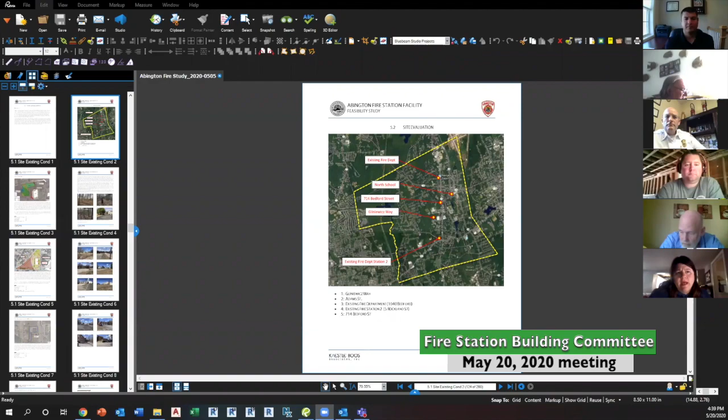Yes, okay great. As Roger just mentioned, we got the 5 sites. Let me zoom in here. So you've got the existing department site, the existing fire station 2 site, and then the 3 sites we looked at per the feasibility study: North School, which was part of the RFQ, 714 Bedford Street, and Gliniewicz Way, which we talked about at our last building committee meeting.

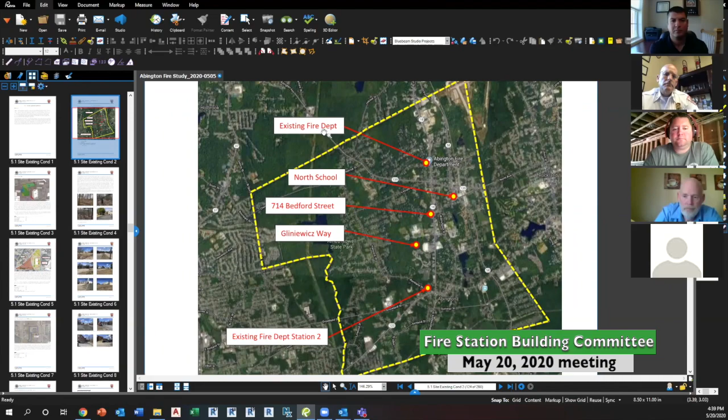But real quickly, just to touch back on the existing department location - it's a small site. Sorry, let me go to the page. Where is that? David, could help me with that. Sorry, okay, this is number 2.

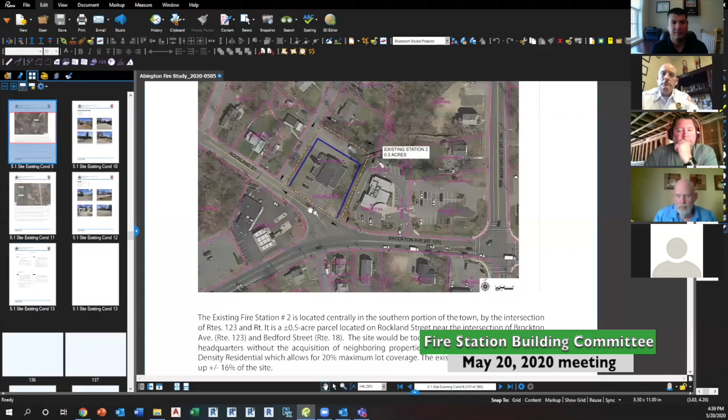Hey Sean, you mind if I jump in just for a moment, if I could interrupt you? Sure. Thanks. Hi folks, again, Chief Nuttall.

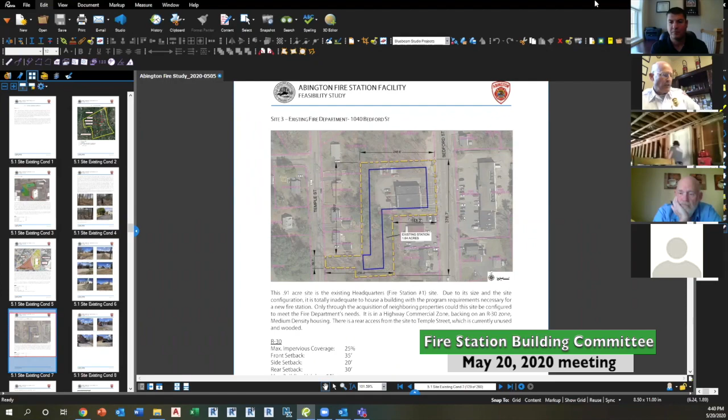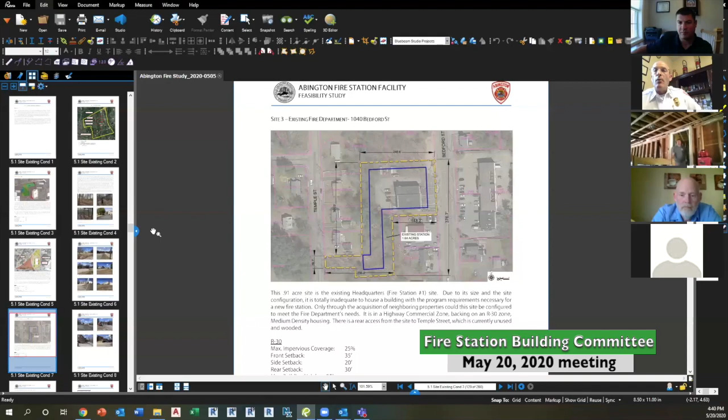Again, thank everybody for being here on this committee. There's been a lot of work on this. Any residents watching haven't had the benefit of looking at the large document we're all looking at now. So before we jump right into the recommendations and detailed screenshots included in this document, if I could just very quickly give a brief summary of what the document is to the residents that haven't seen it.

It's a thick 280-page document, broken down into 8 main parts that looked at all aspects of the Abington Fire Department and the existing stations. The first portion was a brief executive summary. Then it broke down into a very detailed analysis of both existing fire stations - the structures, mechanical issues, limitations, recommended repairs or improvements over time, and the size limitations we have. After that, it gets into a summary of a space needs program - what the Abington Fire Department would physically need for equipment and manpower, the number of personnel on duty at one time, and the space size of the station we would need.

We get into a very detailed response time study. There was a subcontractor that did an incredible analysis on response times from both the existing station locations as well as a couple different possible locations in the future if the town were to choose at some point to go there. We analyzed those sites in great detail, which we'll get into here.

There were some project costs on this with a full menu depending on what the town may want to do if we move in this direction, depending on what is included in the station - if we explored looking at possibly including a couple other town departments, so they're in there, or we can have it without them. We've got a good breakdown menu of that.

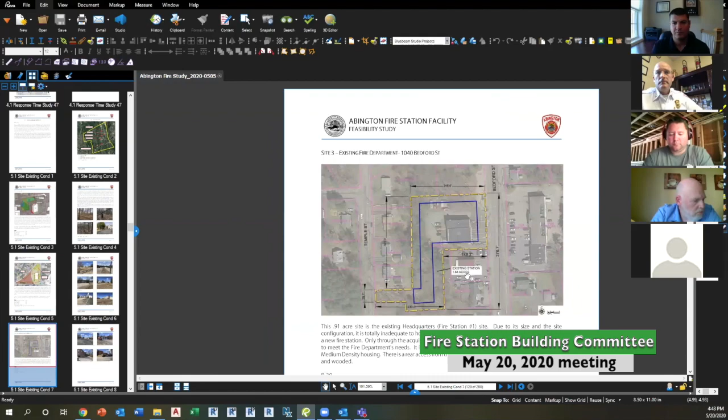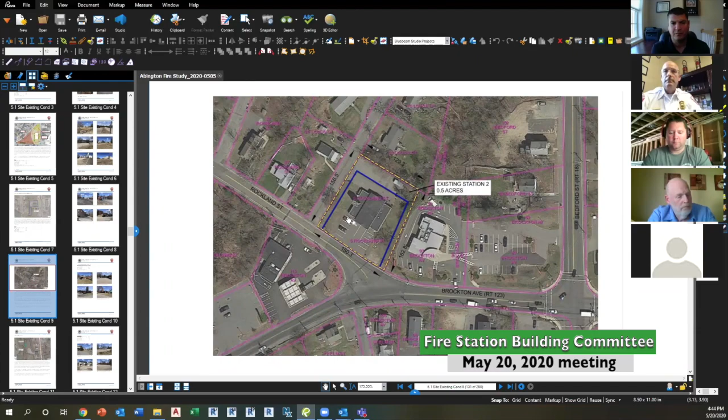So obviously looking into the site, looking at the existing station, it's maxed out pretty much the lot, the buildable area. So any addition, anything in the existing lot is really not feasible. Very similar to Station 2 - this is your property line, and then your buildable setback. So we're pretty much maxed out here. Any sort of renovations or additions to this location is extremely difficult.

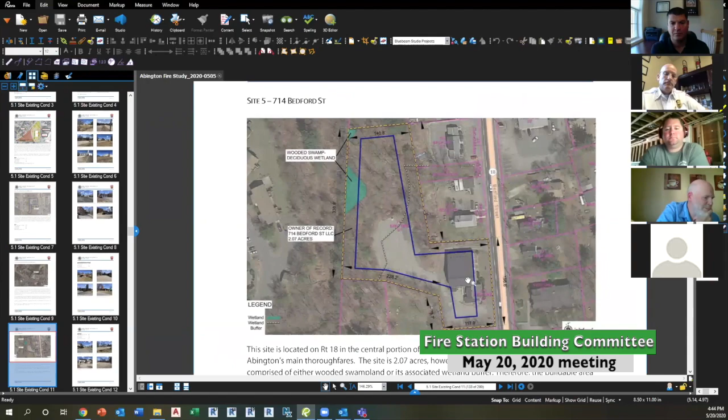After that, we looked at another property, 714 Bedford. At that time, this property was for sale. It was right along Route 18. It had some opportunity to build in around here, in the middle of the site and edge of the site. But again, I believe now - correct me if I'm wrong, Chief - this property has sold.

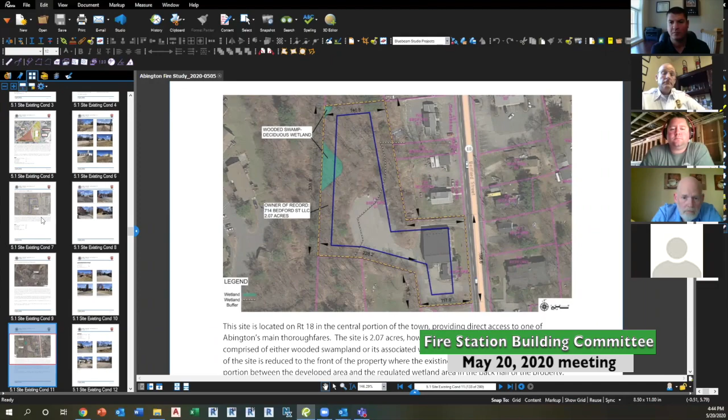So from that, we jumped to part of the feasibility study, and the RFQ was to look at the North School site. At the last building committee meeting, we analyzed it. We saw what was there, looked at the grading, the existing setbacks, and obviously the existing building. We did some hazardous materials reports and found out that there's hazardous materials. So all of those came into consideration, not only on the design of the site, but obviously budgets and costs to look at what it would need to do to put a new building on that property.

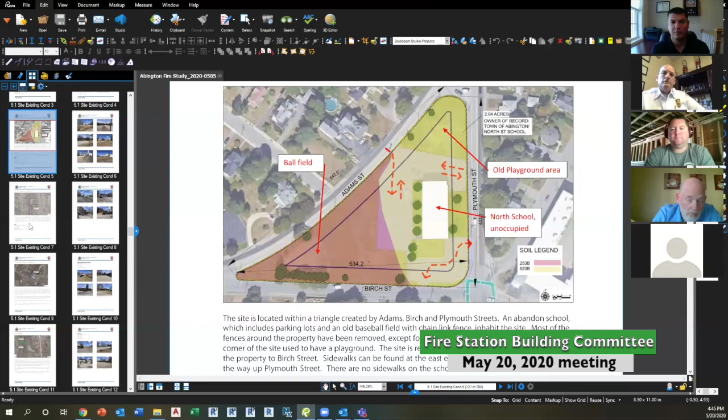And then lastly, we looked at the Gliniewicz Way site. As we all know, it's down across by the high school and the middle schools, down by Town Hall. We looked at this lastly at our last building committee meeting and talked about a couple of the options. There's two separate lots. This lot here is currently owned by the Abington Housing Authority, and this lot at the rear is a privately owned lot. There's been subsequent conversations with the landowner that they'd be willing to take a look - whether it's a sale of the property to the town - to build a new facility on this project.

As we get a little bit further into the study... sorry, bear with me here, take a second to load up. So, pros and cons of each of the sites. I don't know why my computer's freezing on me, sorry.

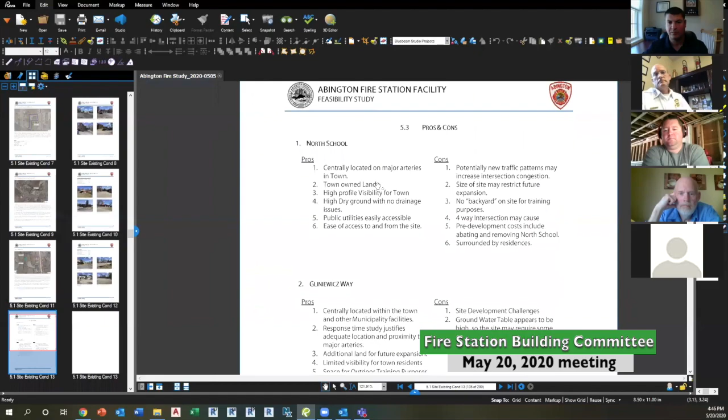Okay, sorry about that. So as we initially looked at it, we have these two sites that we feel have adequate property, some more than others, but we did a really initial pros and cons of each of the sites that we're looking to recommend, not only to yourselves, but to the town of Abington, to construct a new facility.

Some of the pros of the North School: it's centrally located along major arteries, it's town-owned property already, it's got some high-profile visibility of the town, it's on high ground so drainage shouldn't be an issue, and it has accessibility to public utilities and is easily accessible.

Some of the cons on that site: there's going to be a lot of new traffic patterns that would increase some of the congestion of that area, which we touched on briefly last time. The size of the site - as we get a little bit farther, you'll see how there's not much room for growth. We kind of max out the footprint of the building, as well as take up all the usable space on the lot.

Since it's located on a triangular type piece of property, there's no really backyard to the site, so it's all public, and there's no back of house area for the department. A four-way intersection may cause some heavier traffic and some accidents. And then pre-site development costs would include abating and removing the North School - so those costs would have to be incurred by this project, demo of the school, abating of the school - and finally it's all surrounded by a residential neighborhood.

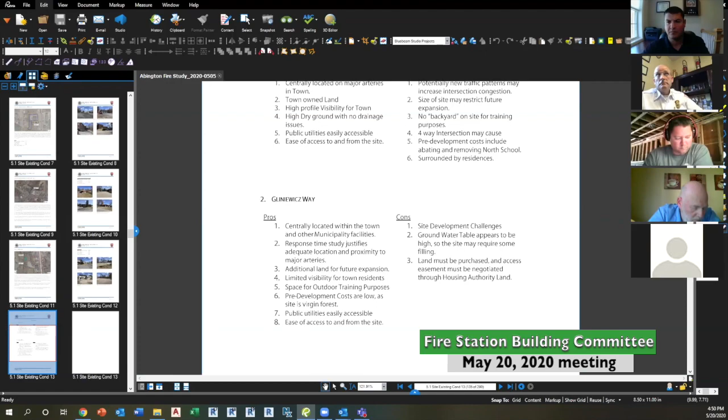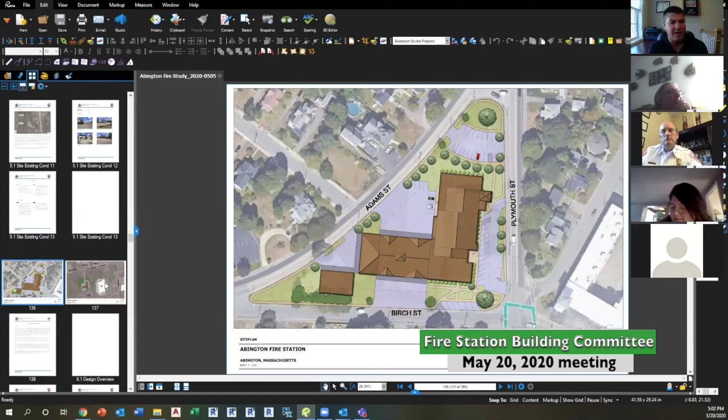Any other questions on this site? As we go through, we're going to come up with a few more things we want to bounce back and forth on. But if you want, this would be just a good overview, and then I'd like to get deep into a few other things, and we can discuss as we go.

Let me try to dig that up. One thing for people to know who either never saw our previous meetings or didn't attend - the difference between these two sites is this lot here is over 6 acres, and the North School site is just over 2 acres. There's a considerable size difference between them. That's why you're able to get so much more apron space, much more parking, and as Sean just said, there's more room for growth.

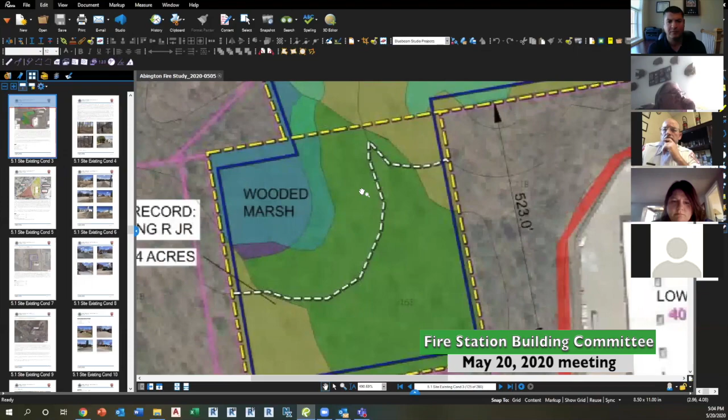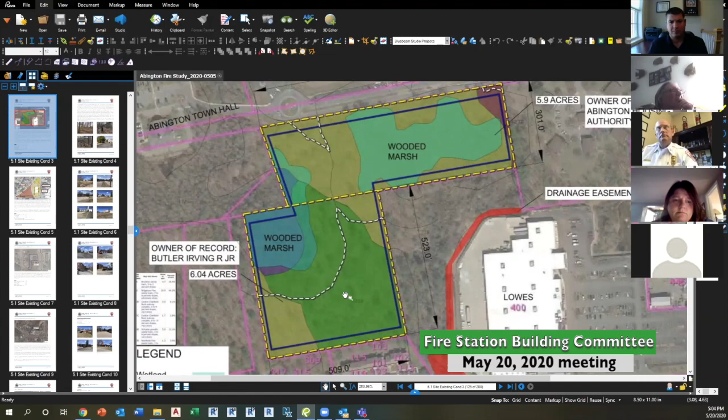As Derek just mentioned, the site size here is 6.04 acres. Looking at the wooded marsh area here and the wooded marsh area in this location from the local or state GIS, the traffic entering the site would be splitting between the two wetlands, with our building placed in this back corner, as you just looked at. The North School site is 2.84 acres - roughly 3.5 acres smaller. Understandably, some of it is wetlands in this area, but it's easier to fit the program required for a new station on this site.

And there would be some other challenges to this site as well, but as far as the wetlands go, the study did note that there was no FEMA or environmental restrictions. There would still have to be some additional conservation and flagging that would have to be checked out, but that was noted inside the study as well.

Correct. When I was reading, question on the entrance - would that have to be accessible or considered a public way or private way?

If I can, Derek, I'll jump in on this. Jim, you're absolutely correct. One of the challenges with this site, the site's a great site where it is. And once we're on Route 18, from that portion, it's almost the geographic center of town. And we get into the propagation studies and the response time studies, that really afforded us the best response times to most places in town. The challenge, however, is getting from that building to Route 18.

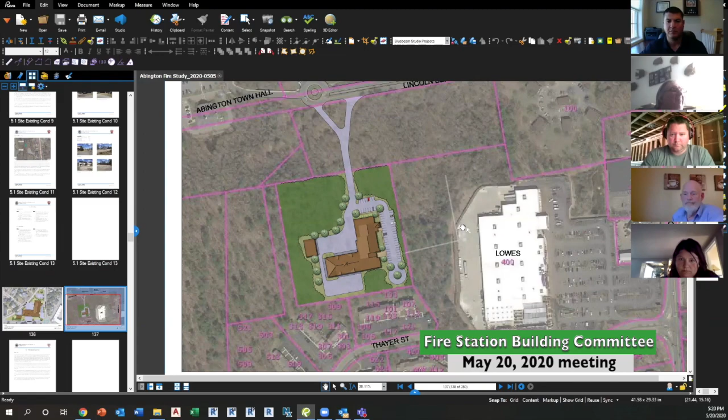But when you look at the amount, you've got parking area, the building, and the roadway out to Gliniewicz Way, that's all going to be shedding water that you're going to have to manage somehow. You're not going to be able to just dump it off into the existing drainage lines out there.

I think somewhere up there it splits off. Either one portion goes to the east and the other goes to the west towards Town Hall.

I don't know anything about water drainage, but could we just make a ditch? I think all those properties behind, to the west of the site, the areas behind Town Hall—I don't know who owns or what's back there as far as water shedding goes.

Everything that's—I'm pointing to the screen, you guys can't see me pointing—but the red spot right there, just south of that, Town Hall. So just south of that, all that area would be to the west of this proposed site. I feel like there's a lot of area there to shed things.

If we have a retention pond, it's a good excuse to train in drafting. That's true. Yeah.

So that comes down to the owner of this lot here, obviously, which is the senior center, whoever that is, and this—I'm assuming this would be town land or housing land here, you know.

But like the chief had said earlier, it is just an island, and that kind of brings a lot of the cons into it. This is why there's more cons on this side, I suspect, because whatever we decide to do there, if the town does decide to use this lot, you're stuck with what you have for land. There's no room for expansion at all.

But the building was proposed in a way that this building study—all the actual space needs for all the rooms and the layout of the building—was designed to get the square footage, which was roughly around 40,000 square feet, I believe, Sean, just below. And that's designed for a building that's prepared to be there for a long time.

It's got room to grow for the building, but as far as space outside the building, where we do a lot of fire training, hose testing, aerial operations—there's a lot of things that we do outside with our vehicles, and that lot was pretty tight.

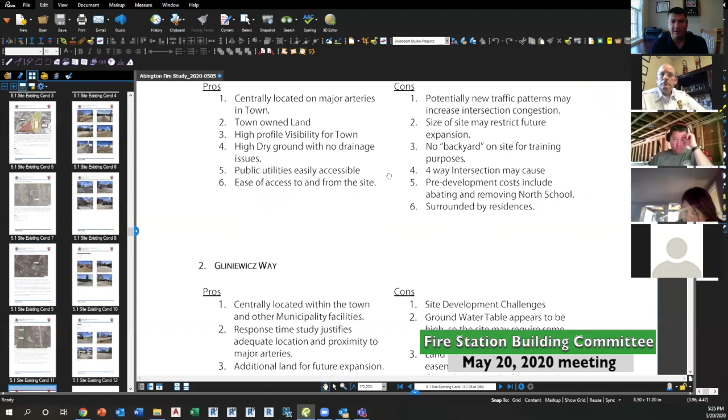When you look at the Gliniewicz Way site, I feel like it's opposite. Things would take a little longer to get going from the start. There'd be more work up front, but it would provide a long-term fix for the town going forward. There wouldn't be any restrictions going forward with that site. But there are site development issues, groundwater issues, and egress issues that we'd have to look at.

The restrictions on Gliniewicz Way that you might want to consider are the amount of wetlands you have and how much wetlands you can alter. If you alter the wetlands, you have to find an area to replicate it. You're never going to get rid of it, so keep that in mind.

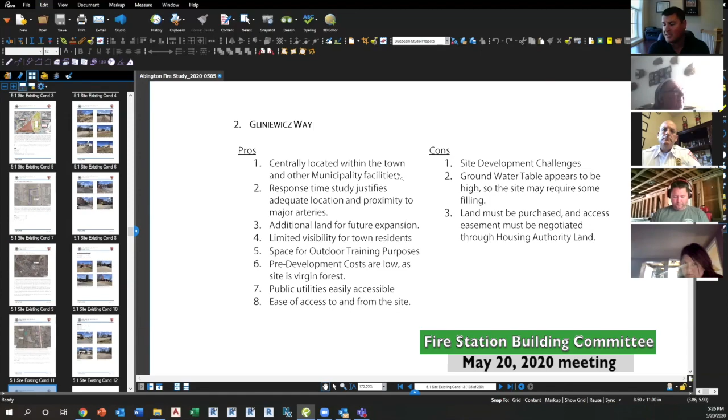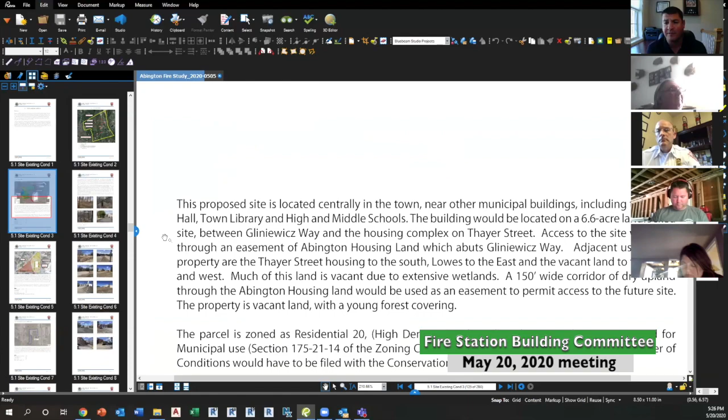So the study did show that back bottom corner of the lot didn't have any restrictions, according to the current maps that KBA was able to find and put into the study. That back area is where you'd build the building itself, and the amount of area you'd need for large aprons and space to move around, except for the northwest corner of that picture, the wooded marsh. That would be the area that we wouldn't be allowed to do anything with.

But the bottom area would work. Yep, correct. So where we brought in a road, we're splitting the difference between the two wooded marsh areas and constructing the building in this L-shaped portion, the lower portion. So for stormwater management, we're not touching these two areas, but we're able to manage some of it over here, and some over here.

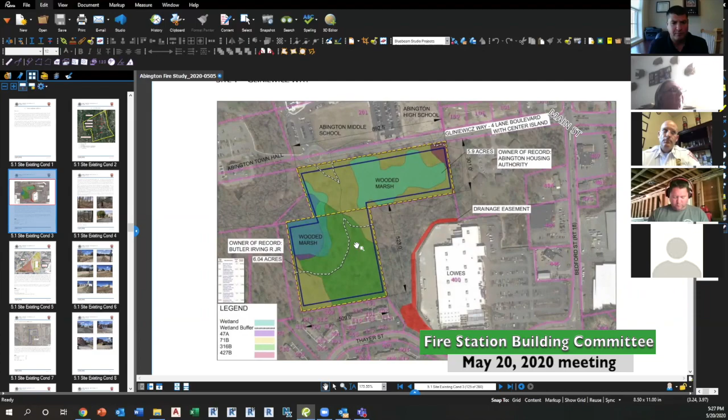Jumping over to this, you can overlay these two maps. Again, this upper corner is untouched, so stormwater management happens over here, and then probably in this area, potentially tying into Lowe's already.

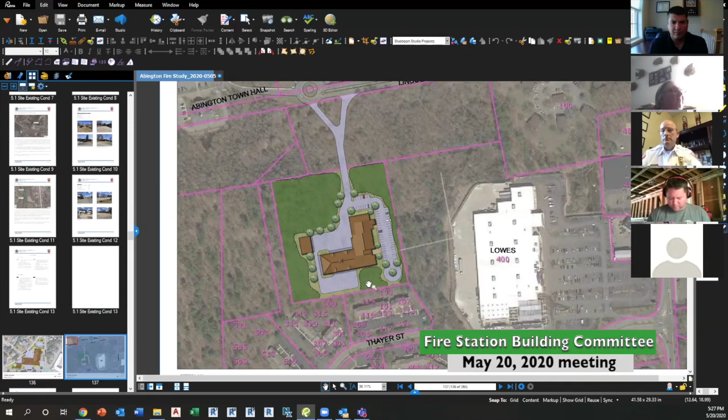Can we go back to that previous illustration? I'm wondering, what is the white dotted line? Is that a 100-foot setback, or what is that? This is the setback off of these. Okay, so we're putting everything in this corner. The roadway, yes. It has a 100-foot setback, so we can clearly go in this area, correct?

Yes. Considered what they call a buffer zone from the wetlands, a 100-foot buffer. Because Jim, to be honest, I absolutely share your concern about the wetlands, and if we had to replicate wetlands, sure, we can do it, but we have to pay for that. Yeah, it's costly, very costly.

But one of the biggest concerns I would have is the stormwater management for the overall project. And everyone knows that the water table in that area is very shallow, so whatever type of system you put in has to accommodate that.

I believe Sean mentioned earlier that they did factor a lot of that into some of the allowances for the site work. If you looked at the cost analysis between the two, I think the site work was a little bit more for this because of the extra work it would take. But again, they're all allowances, budgetary estimates. I can dig into the exact costs, but I believe we're about $1 million more on this site.

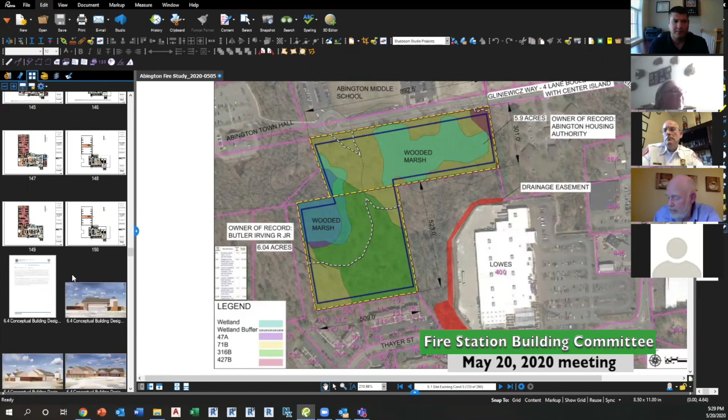So Gliniewicz Way site development allowance, we're at 3 million. Yeah, $1.5 million. And then we did a site work allowance at North School site, $1.5 million. So we had about $1.5 million more on site development costs. Number one, it being undeveloped, and bringing in infrastructure. And then the other piece would be stormwater management and additional wetlands, all of those items that would need to be considered once we proceed with design.

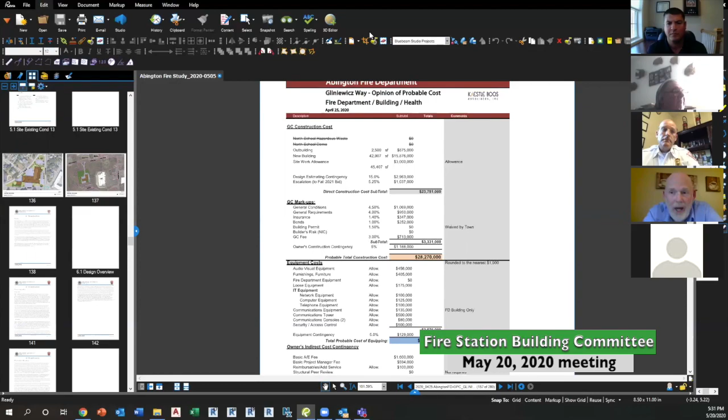So my concern, not really a concern, it seems strange that the delta is so small between North and Gliniewicz Way, and that site development cost of $3 million probably does not take into budget any potential future roadway. Would that be a correct assumption? Yes, I think because that's more of that long-term solution. Obviously if it's an additional roadway that's cut through other lots and wetlands, so we really haven't—do we have an allowance for potentially doing that work or no?

Or is that yet to be determined? So there's no allowance, no budget for what you don't know. Correct.

So we don't have like a contingency dollar value. Yeah, we've got a lot of contingencies built into that, but there's not a specific line item for a new access road, whether it's parallel to Lincoln Boulevard, running out to 18, or running through here, going out to 18, or a road coming off to there.

I mean, we've budgeted enough to carry what we're doing on this lot that we feel comfortable with. But obviously, any additional roadways, as you know, that's a separate project within itself. But we do have fairly healthy contingencies built in.

Just at this point, we're at, I don't see it. I thought reading a 5% contingency. So we got a 15% contingency just on the design. Okay, so on the design.

Correct. So built in, not to get into too much right now, but the $3 million site development costs, or site work allowance, design contingency built into that. So it's roughly $3 million additional design contingency with those slight escalations of construction, or bid of next fall, which that's escalated out 5.5%, 5.25%.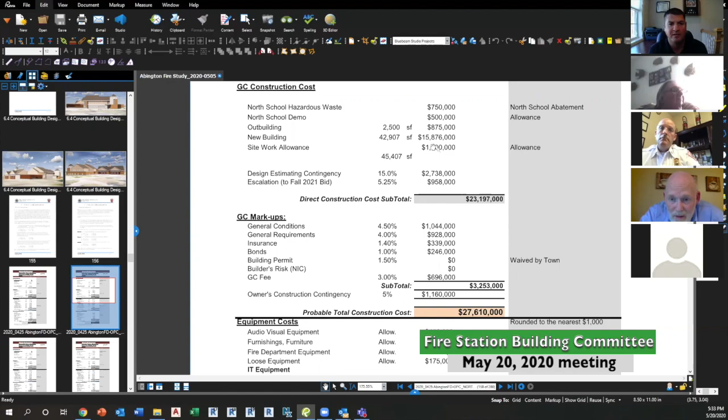And the North School site, the two allowances, although those differences are 1.5 million in differences for site allowance, what this one shows is that that's a full $3 million allowance. The other one shows a 1.5, but doesn't show that you have to also subtract the 1.25 it would take to tear down the building and do the hazardous waste.

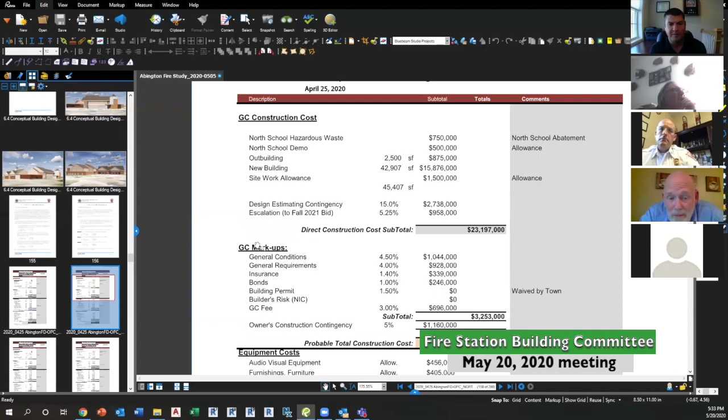Right, that's a real expense. That's a huge expense. When I look at the owner's construction contingency at 5%, I mean, they're all just numbers at this point. I think it was just about 5%.

A little bit higher up, I think. A little on the light side, oh, I'm sorry, side when we have so much unknown. But I guess I'm not sure what. I'm just going to let you continue with the presentation. I got to absorb this some more.

If I could jump in just for a moment too, because now we're getting into the numbers, I just want to talk to everybody on the committee as well as the residents, which we are all residents, because we're seeing some very large numbers, and quite frankly, there was sticker shock when we first saw these as well. You know, KBA explained how they got to the numbers. We agree with the numbers and how they got to them. However, we're not blind as to the economy that we seem to be slipping into at the moment, and we don't want to make the residents think that we're not.

Certainly, there's needs for the fire department. You know, the document's heavy. It really comes down to these pages. What would a recommended cost be? And we're looking at very large numbers.

This is not monopoly money. This would be our money, and I fully understand that. So, and again, to the residents, we're not quite sure where this is going to go. Ultimately, you'd have the votes, assuming what this committee decides to recommend to the Board of Selectmen, and then see where it would go from there.

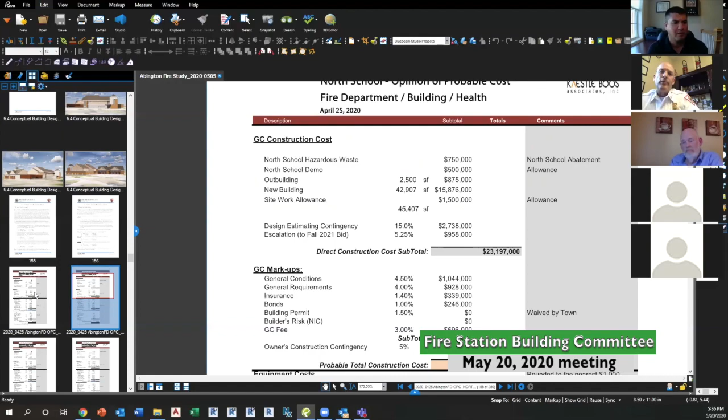So if you want to start getting into the numbers now, Derek or Sean, I just wanted to preface it with that. That initial page, I think it's either 155 or 156, a couple before these, just shows the actual cost estimates. I think it's the next one, because this is just the construction estimate. This is the total project costs. As the chief said, this is kind of like the menu of what's going on.

There's two different sites that the committee came to agreement with in our last meeting, and then it came down to, well, we did a floor plan space needs program with the architect at the very beginning of the feasibility study, and he designed rooms based off of everything that we do currently out of the Abington Fire Department and what the needs are for the department. So that was room by room, which came up to a general square footage. You can see it there - it's roughly around 40,000 square feet.

The differences in those are if we took off a couple of the departments that we had added in there. Initially, we were trying to fit the health department and the building department into the building to try to help free up some space at the town hall building. The two departments kind of work hand in hand with the fire department as far as fire prevention goes, and the health department, because we run EMS, emergency medical services, out of the fire station. It kind of seemed like a good fit, but that would make the building a little bit larger and cost a little bit more.

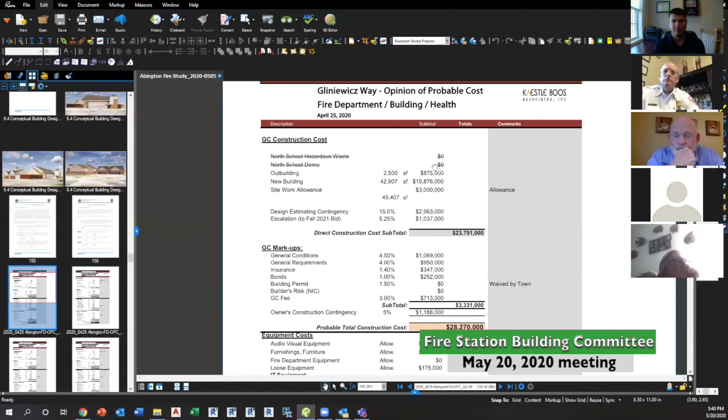This one obviously doesn't include North School hazardous material, waste, and demo, so that's kind of in the positive right away. These are the initial square footages of what this is - kind of our maxed out square footage of the new building and the smaller outbuildings.

So those have 2 different square foot costs. Really what it comes down to, that's our generalized budget estimate for those 2 buildings. And then the site allowance, which we just discussed a few moments ago. So overall square footage of construction, roughly 45,000 square feet.

So with that, we always build in contingencies from a design aspect. At this stage, we're usually right around 15% or so. So again, there's another $3 million design contingency. Escalation, again, on today's standard, even before we were dealing with what we're dealing with right now, but starting into next fall of 2021, this is an escalation cost and you may see things. So then you get a direct construction cost budget estimate of roughly $23.7 million.

And then we talk about looking at general contractor markups. These are typical for all different construction types, construction projects, specifically in Massachusetts for public bidding. But you have your general conditions and general requirements. That's kind of the initial overhead and profit for the contractor, and that roughly goes between 8.5% to 10%, depending on the economy. Insurances, that's normal. Bonding, that's normal. Building permitting, since this is a specific town project, in most scenarios these are waived by the town, so that's a 0% analysis there.

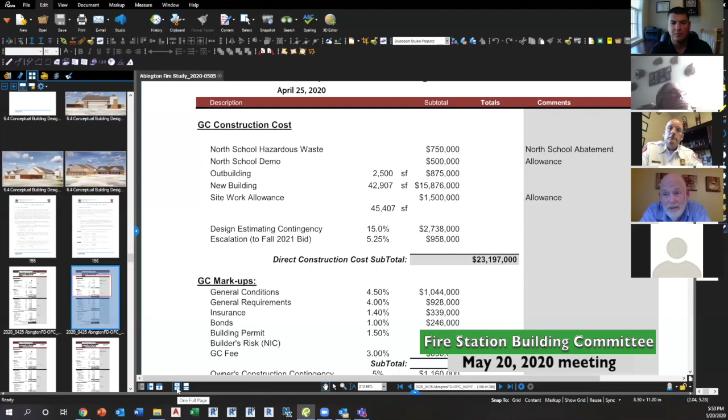It's actually highlighted here in the study as well. There is no dollar figure with it. It did say that it would produce, it could produce surplus properties that would help reduce the overall project cost. But it specifically says that they have not been factored or included because nobody would know what it would be worth. And as Roger said, it will come down to the town on where those funds go. But again, obviously there is some funding that would come from that. And this is, in a way, kind of your worst case scenario built into the knowns that we have. Obviously there's still some unknowns, many unknowns, but built into what we have currently is where we are.

So again, this was a similar budget estimate built into those three scenarios. As Derek alluded to earlier, this is the first scenario where we have the two sites, the full fire department, the full building and health departments built into the square footage. That's kind of your worst case scenario, maximizing square footage. The next round of estimates has some additional efficiencies built in, consolidating some of the community spaces and reducing square footage to help reduce costs. And then lastly, the very final one is just the fire department only, eliminating health and building department, and continuing with those building efficiencies.

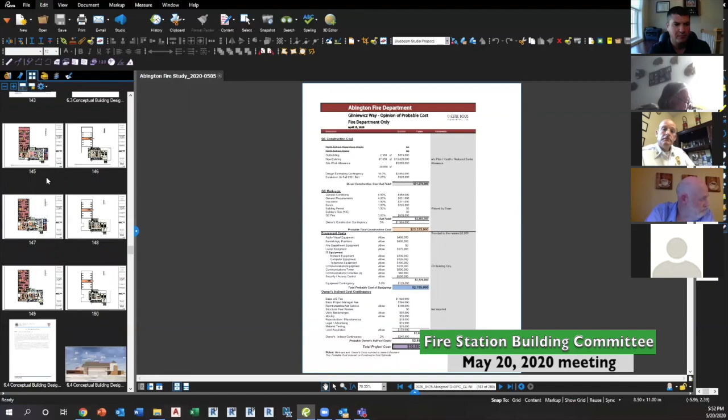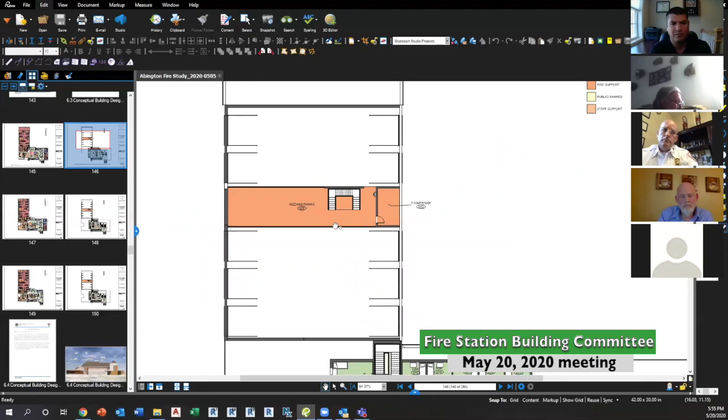The next floor plan has a little bit more efficiencies. It's very subtle, but again, what I was talking about with the 6th apparatus bay and consolidating these storage rooms on the outside - a little narrower apparatus bay, so a small square footage reduction there. We got rid of a few hallways in and around here, consolidating a couple spaces, but it's very subtle and still keeps the entire program within the floor plans.

And then upstairs, again, pretty much similar, just reduced. We still have the same amount of bunks, just consolidated them around the perimeter. Again, very subtle, but an opportunity to reduce some of the square footage.

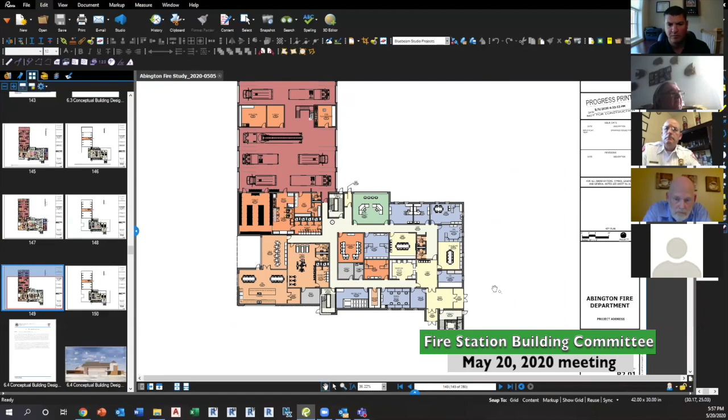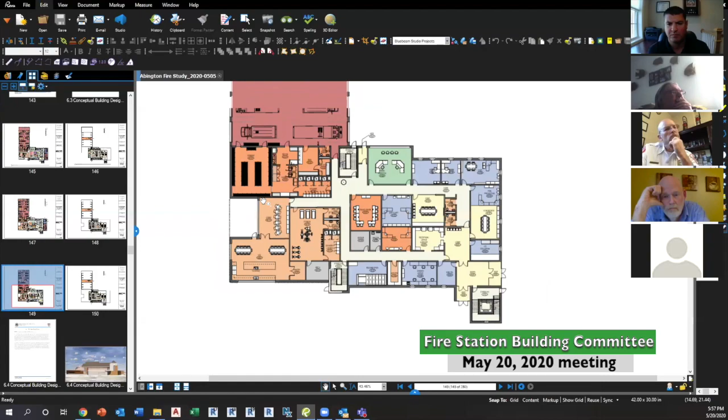Then lastly, as we've been discussing, the last one omits the program of the health and building departments. Again, a main lobby vestibule area for the stair to go up to the meeting and training areas, and a separate lobby - kind of duplicated spaces - but a separate lobby and reception area to get into the admin portion of the fire department. Again, all the same program around here, just reconfigured slightly. We still have the 6 apparatus bays with storage and vendor storage on the outside.

And then lastly, going upstairs, very similar to the last one. Not much has changed, but again, just consolidating the bunks with the captain's bunks in the corner here.

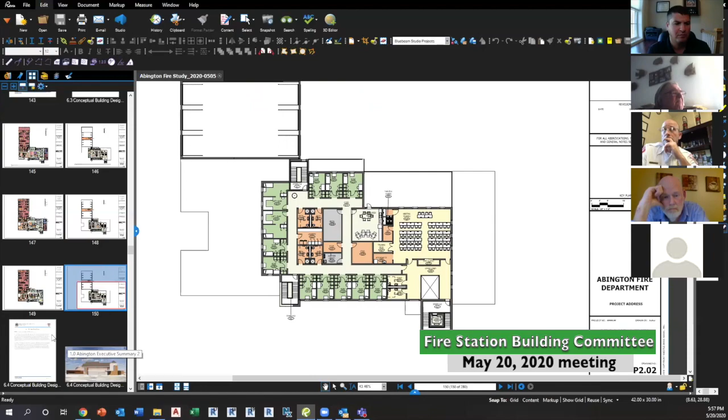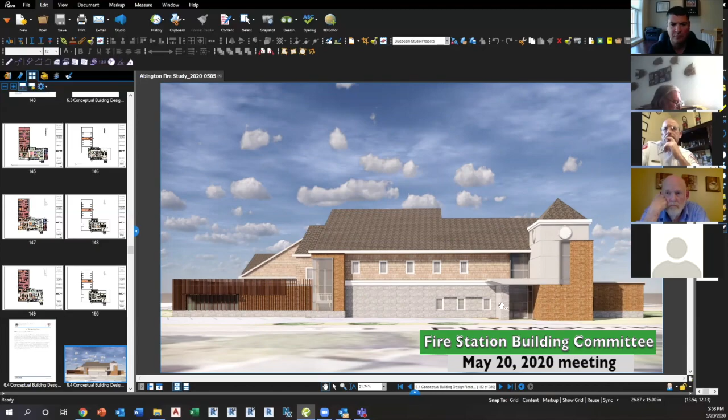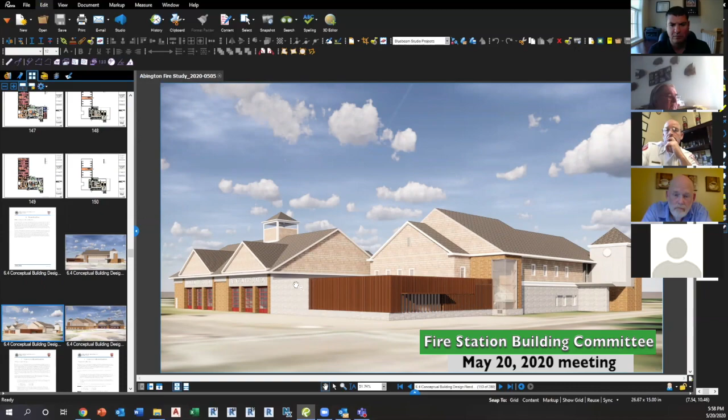I know that was pretty quick, but from that we took the building massing. Obviously there are many different approaches, but this is the view from the main entrance. This is the stair tower. This would be the building and health departments, and here you have the back of house admin areas and the bunk rooms. This is the fitness wellness center and break room area along this side, and finally going to that corner wrap in the building - this is the wellness area, the locker rooms, the dirty rooms, break areas in this corner, the admin and bunk rooms, and then the apparatus bays.

And then lastly, this back corner again, here is the building and health departments, the training room, meeting room area, and then this bunk area over, bunk rooms areas over here, dispatch, admin offices along here onto the apparatus, into the apron, and then you have your apparatus bays here.

So it's a combination of cedar shakes, clapboard siding, metal panels, obviously there's many different options, stone, brick, kind of keeping it in the vernacular of Abington, in this region of Mass. But all this from the budget estimation came into consideration, and that's where we came up with our square foot cost on similar building types in our recent projects. It all is in line.

So again, obviously this is just one pass. This is an idea. There'll be many, many other iterations, but this is where we completed our study with imagery as well as the floor plans.

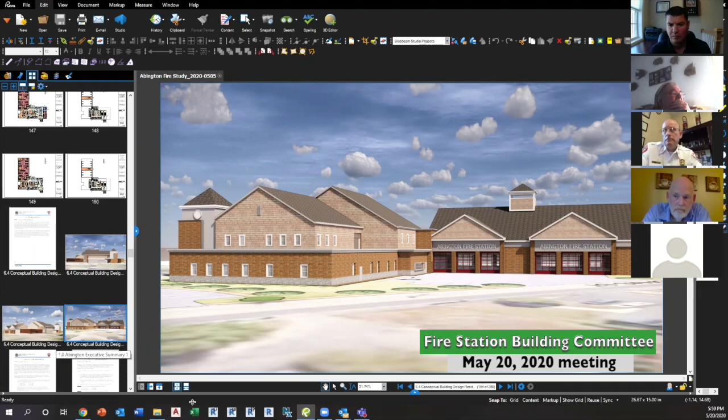And that's pretty much it. That kind of shows out the whole layouts of the different styles. That's all the stuff that the architect took room by room and designed it to come up with the square footage for what the building would need to be.

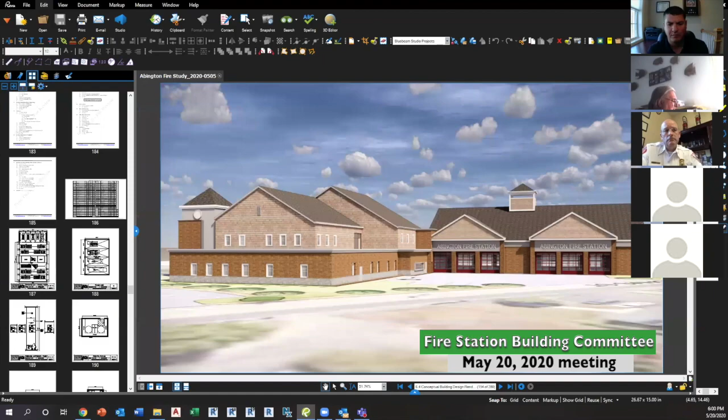Correct. Exactly. So as Derek mentioned, we had our third-party consultant that we've worked with for the last 25 years for fire department programming. So we spent many hours in the beginning of this project going through Zoom meetings just like this, so we took piece by piece.

This was an apparatus bay, and we talked about each vehicle, each type of vehicle, the size, the clearances, and walked through how it was necessary. I don't need to go through every single one of these, but we really dove into each.

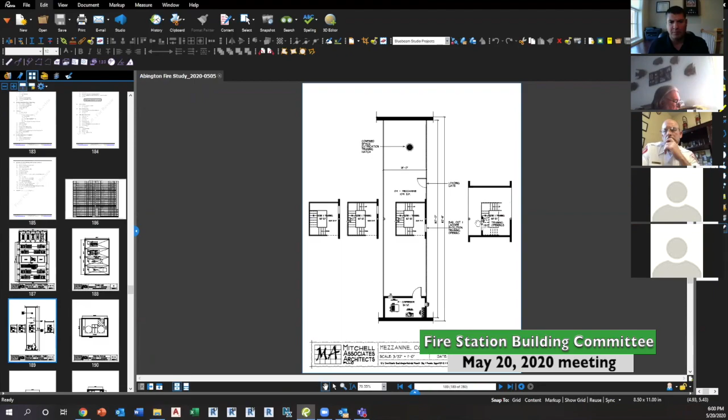This is the training mezzanine tower area. So you get the training stair tower, where the compressor goes, where the extraction training hatch is, stuff like that.

This is the firematic storage. Again, they just went room by room by room, methodically through each space - where the turnout gear goes, how the laundry works, how decon works. They got sign off with the department on each of these spaces.

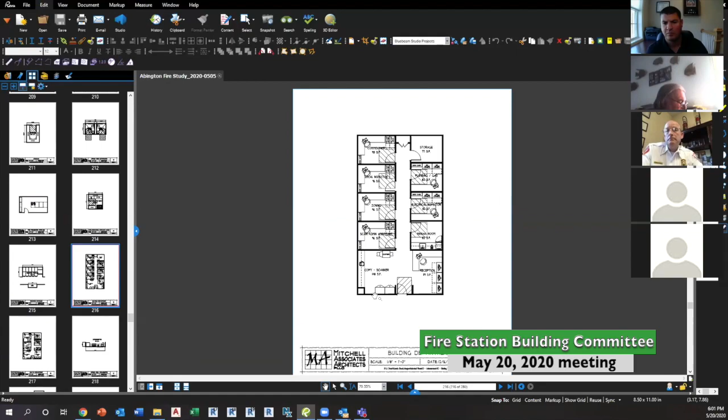And as we went through each of these rooms, we then took it and put it into our initial floor plan. Here's a general layout for the building department and the health department. So again, there's many, many little floor plans that go through all these spaces on what would be the best scenario for each of these rooms, and that's how we derived our general floor plan layouts.

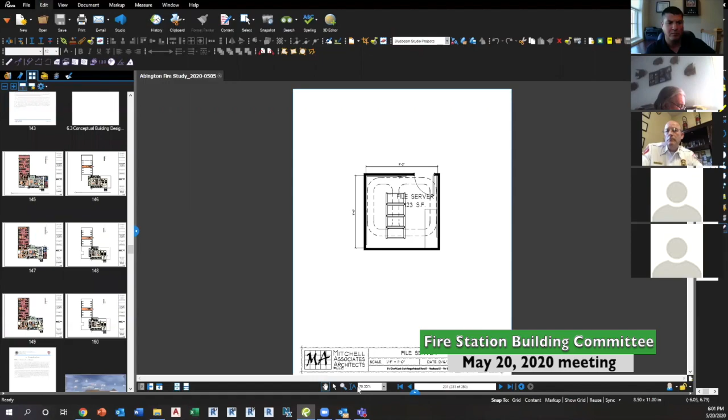Sean, if I can just jump in too, just to put into context for everybody, this is very similar to most of the fire stations that we visited back in the fall and the winter. We visited about 10 or 11 fire stations, fairly recently built within the last 10, mostly within the last 5 years, both in Plymouth and Norfolk counties.

And this really is the standard design that most towns are doing at this point. This isn't something we just created - let's make a big fire station for Abington just out of thin air. This is really kind of how most fire stations are being built right now, very similar in size, very comparable to a lot of the towns that we saw.

In fact, I think the scene on the front cover of this, that's the Randolph substation, the new one that they built on North Main Street in Randolph about 2 or 3 years ago. I believe that's Randolph, but I could be wrong. We saw a number of fire stations.

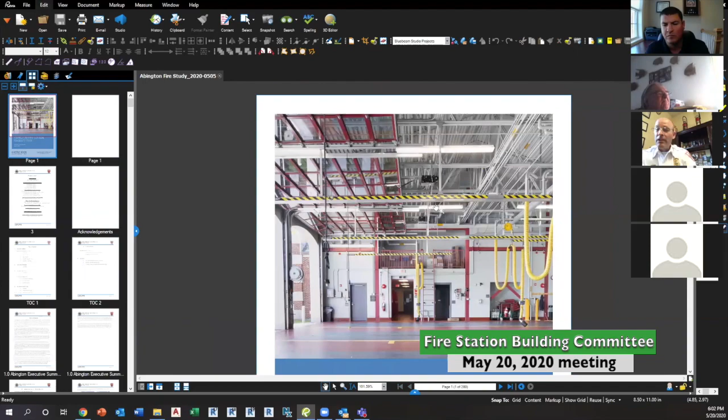It could be Plainville as well, but this is really what everybody's building, and it's based on the science of what is needed for the appropriate size around the fire apparatus, the appropriate separation of the hot and cold zones - the hot zones are where the diesel exhaust is, where the contaminants and biohazards are from the ambulance, especially now. Everybody's very familiar with decontamination. You can imagine what we're going through now, as well as the issues we're having currently with social distancing in our fire station. These newer stations they build aren't having as many problems. We're overcoming some very significant challenges with what we have now.

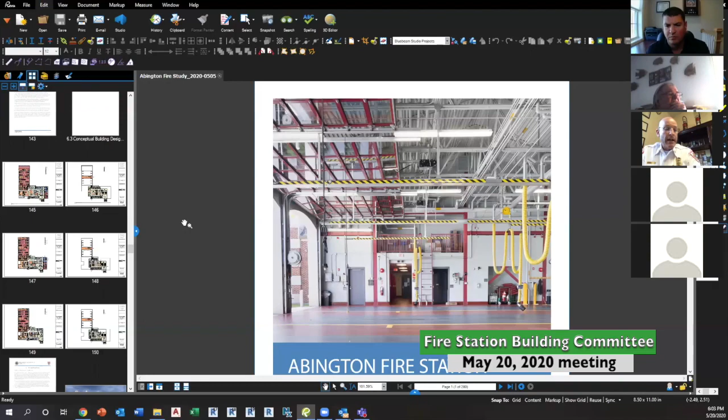And some of those other factors that you brought up are things that we don't have, like the hot to cold corridor. There's a decon area there to get from the area of combustion and any other contaminants, so they don't go into the main part of the building. That's one of the biggest safety issues we have now. Over the past 5 to 10 years, this has become a mandatory part of every new building being designed. Sean, you could probably go into more detail, but this is something every new building is being designed with to keep everybody safe.

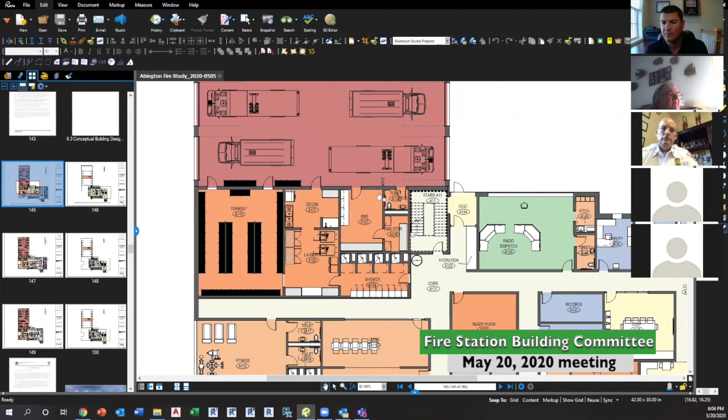Yes, exactly. Keeping the dirty and clean areas separate - as you're coming off the trucks, you're decontaminating here, washing all your equipment in this station, and going straight to your turnout locker rooms and showers. Before you get out of there, you come into the clean part of the building. This is all secluded and kept completely separate from the admin and clean areas of the department. As you can understand, what they're dealing with now is everyone on top of each other currently in those two stations, so there is no separate areas of clean and dirty.

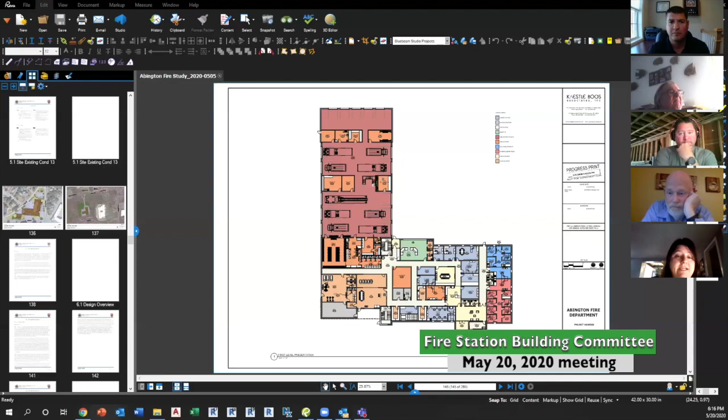I also say no to the North School location because I live in the area and I see the traffic, and I don't think it's going to be beneficial at all. I definitely am for Gliniewicz Way though, and I think the traffic is going to ease up. I think you guys have a good plan. So, no, I say no to that.

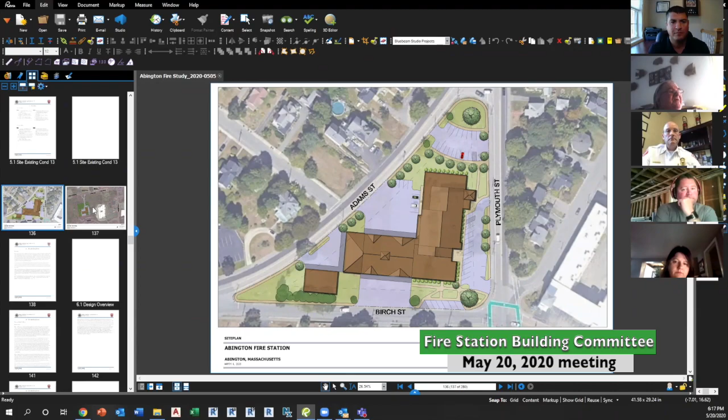Any other discussion on the motion? I just think that the environmental issues on the Gliniewicz site are going to be a significant factor if you go to develop on that site. That's my opinion. I've known that land for a long time. I just know you're going to have issues. Anybody else?

So the motion on the floor is to propose the North School site as the selected site. All those in favor, say aye. All those opposed? Nay. Nay. Nay.

All right, so does that automatically make the Gliniewicz Way site the preferred site, since the motion for the North School proposal got 1 in favor and 4 nays? Or do we need to make a motion to make it official? Or make a motion and have discussion?

We need to make a motion and take a formal vote. For the purpose of clarity, I'll make a motion to utilize the Gliniewicz Way site as the future site for the fire department. I'll second it. All right, the motion has been seconded. Any discussion on the motion?

So once again, I'm going to express my concern, and I think Jim's concern as well. I'm still concerned about the environmental aspects of it, and I'm concerned about the access in and out of the site — well, out of the site, not so much into the site, but out of the site.

That being said, the delta is so small and the potential value is there. That would probably be my vote for additional investigation until we had those two issues somewhat resolved or have more confidence in the direction. Both sites have their cons, but like you said, if the cost difference is that much, I feel like any problem can probably be overcome.

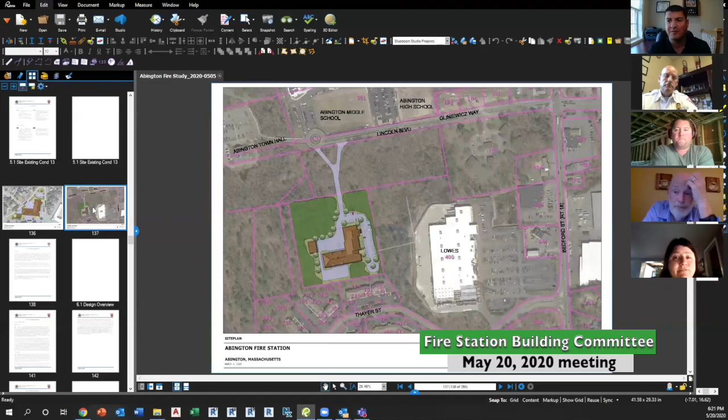To piggyback off of Roger, I actually was against this in the beginning. I thought, I didn't see your fire stations, and I was just thinking of the area you were already in on Route 18 and that there was probably a way to expand. But after seeing the fire stations and talking with you guys and seeing everything, I am definitely for a fire station. I know that it's well deserved and it's needed, basically. And I like the idea of Gliniewicz. I think hopefully the town will agree with us.

Any other discussion on the motion? All right, then we'll make a vote. All those in favor for the Gliniewicz Way site to be the preferred site for recommendation, signify by saying aye. Aye. And opposed? All right, four ayes to one opposed, so we can at least have some sort of recommendation to present to the Board of Selectmen.

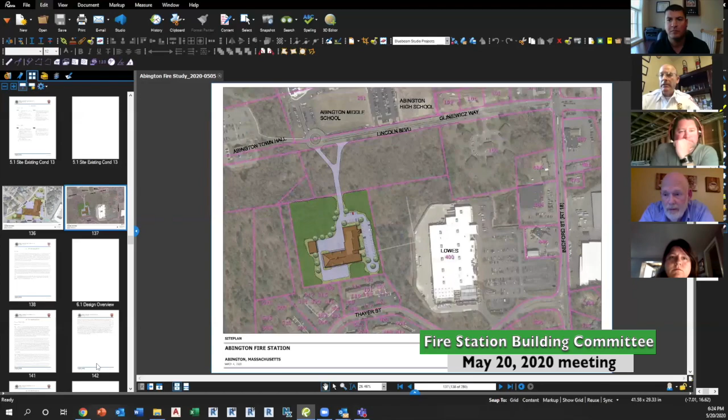Ironically, as Roger said, we're one of the busiest departments over the last couple of months, as well as Marty, the Board of Health, the police certainly, but my department, our paramedics, really have borne the brunt of the workload in the last couple of months for this town. And ironically, we're in the oldest, smallest buildings in town getting all of this done. There have been unbelievable challenges that we're not even going to share with you, but at this point, knock on wood, we've had no exposures. We're very proud of that. We were able to get around it, but it's been difficult.

So thank you for this. Chief, thank you for your hard work and all the members of the department. Thank you very much. It doesn't go unnoticed. Thank you.

I don't think there's anything we need to give to the selectmen for creating an article for town meeting, so I think it's just what we voted on tonight. Keep them informed of what we're doing. If we have the opportunity to go to town meeting, we would be able to give a presentation and explain in depth. There's still some time where we can get information out there. There's a lot to digest, but the meat and potatoes of this study showed the 2 sites and the cost. There was a lot in there, especially if people have questions about the current station. The KBA did a great job on the study, going in depth. We didn't talk about it so much because we knew we've already seen a lot of it, but I'd be happy to answer any questions for anybody in the future that has them.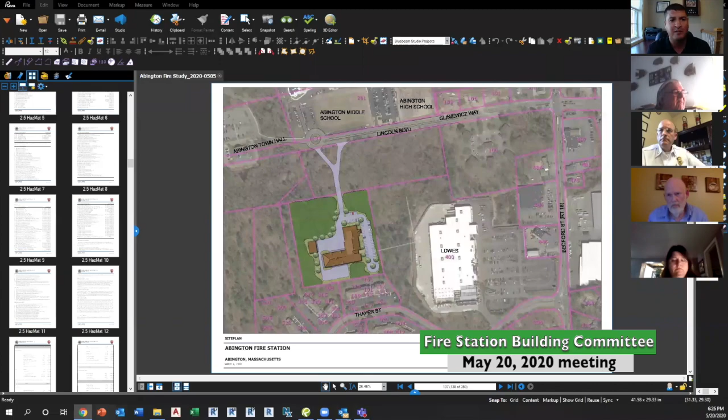So, Derek, can you mention the website? Yeah, so there is a website that part of the study actually comes with, and thank you, Chief, that slipped my mind. So there is a website, and maybe Sean, we have a couple more minutes, maybe you can mention it, but there is a site that was designed that we'll be able to get out there and share, and that will have the study and all this information on there that we can make readily accessible to everybody, probably by beginning of next week. Yeah, I'm trying to remember what the site is. But yes, what Derek mentioned. So we have the site, and it has all the information of what we've been gathering over the last 4 or 5 months.

Pretty much it's all in this report, but we have the hazardous materials reports, we'll have photographs, we'll have everything that we've gathered to date. So it'll be utilized for you, the town. They can put it on Facebook, put it on whatever social media, get it out there. So it'll be a very quick way to utilize the information that we've gathered for you guys. Trying to find it, I could pull it up. But we're going to make sure the fire department Facebook page has a link to that as well. We'll make sure we have that connection. I will make sure that once it's all updated and has all the current stuff on it, we'll get that out there right away. So we'll make that accessible.